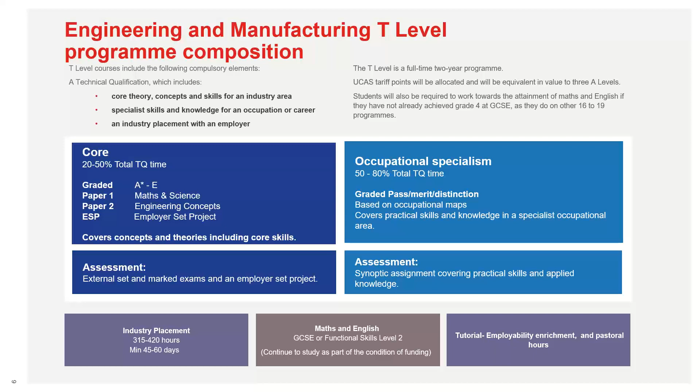The guided learning hours for this T level remain the same: 680 guided learning hours for the core and 680 for the occupational specialism, giving a total of 1,360 guided learning hours. For context, A levels are about 1,080 hours, so we've worked out this T level is roughly equivalent to 3.5 A levels.

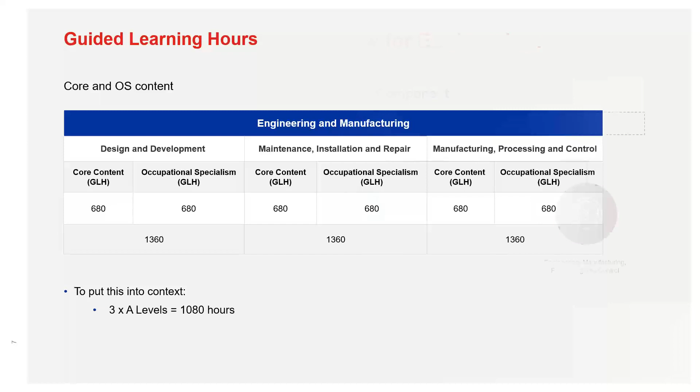The technical qualification for engineering is split into 3 pathways, with a generic engineering core that everyone completes. We're going to look at the engineering, manufacturing, processing and control pathway, which is split into 4 occupational specialisms: fitting and assembly technologies, machining and toolmaking technologies, composite manufacturing technologies, and fabrication and welding technologies. In this webinar we'll go into each individually and look at the specification and the occupational specialism assessment.

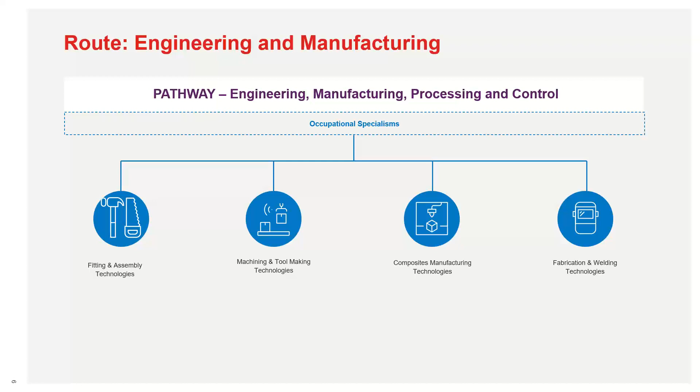The specification can be downloaded from our website, and these are the live versions. In the PDF handout, if you click the link under T-level engineering manufacturing control as shown on screen, it will take you directly to our website to view the specification. You can also access it via the T-level landing page at the top of the screen.

If you didn't have this webinar or the PDF, how do you get to our specifications? On our website, in the search engine at the top, type in 8713 and press search. Under the search results, you'll see it listed as T-level technical qualification in engineering and manufacturing. Once you click that link, you'll go directly to the specification page.

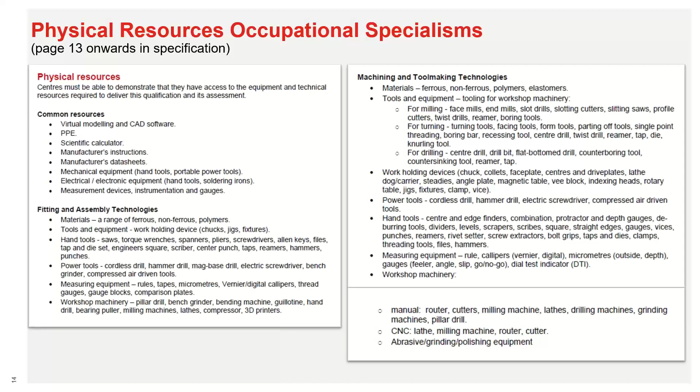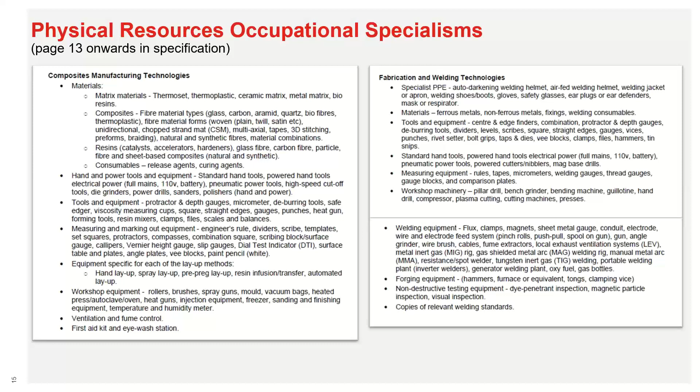So what we've got now is the actual qualification scheme component. Within this specialism, as in our previous webinars, there are different durations for different tasks. Fitting assembly is 25 hours 15 minutes, machine and tool making is 25 hours 15 minutes, composite manufacturing is 24 hours 15 minutes, and fabrication and welding is 26 hours 15 minutes. Different tasks have different durations to complete the assessments.

The mark scheme is still 90 marks and the weighting is still 100%, and it's externally moderated - marked by yourselves and externally moderated by us. The final award for this will be pass, merit and distinction.

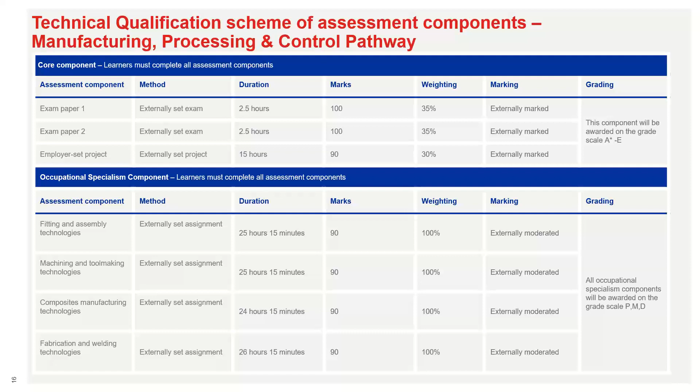So just in summary, it contains 90 marks, a variety of durations across the different occupational specialisms, externally set by us, internally marked by yourselves, and externally moderated by us.

It's an overarching project brief. It has a range of individual tasks that are mapped to the performance outcomes per specialism, and we'll look at those in more detail.

We've also got the mark schemes that reflect individual performance, and the mark scheme is classified as a threshold learner - i.e. a pass - up to a distinction learner. So you've got different mark schemes to apply for this assessment.

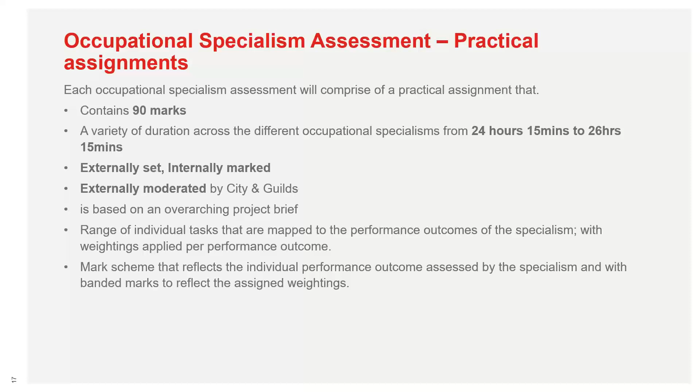What we're going to do now is look at these occupational specialisms in more detail, starting off with our fitting and assembly technology.

The fitting and assembly technology has performance outcomes weighted as follows: 17% for PO1, analysing; 20% for planning; 27% for producing; 20% for supporting the delivery material - in other words, monitoring the processes and doing quality checks; and 16% for producing that communication.

What you also notice on this specification is that there's no collaboration working with others, like in D&D and MIR. So again, it's more about analysing, planning, producing, quality checking, and communications. The weightings for each performance outcome will remain the same for every version of that practical assignment in fitting and assembly technologies, to make sure we're meeting industry needs and it's comparable between each assessment over the time of the qualification.

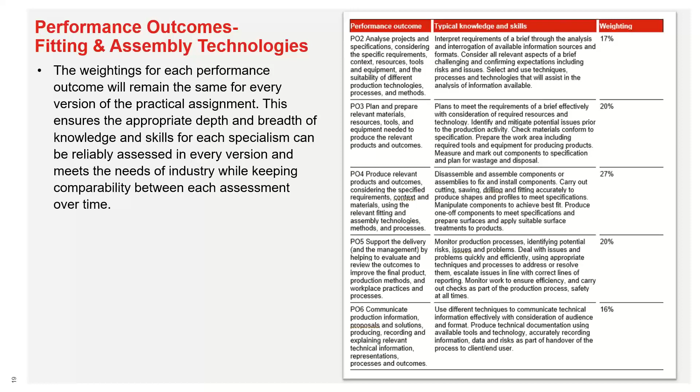To find more information, we're going to look at what an occupational specialist assignment is - you can find that on page 33 in the specification. As previously said, it's externally set, internally marked and externally moderated. For fitting assembly technologies, we're going to be doing analysis, planning, producing, supporting and communications.

With the assessment overview for fitting and assembly, we're going to do assessment themes that will be marked against those grades, from threshold to distinction. That's going to be health and safety, planning and preparing, production, and quality review and evaluation.

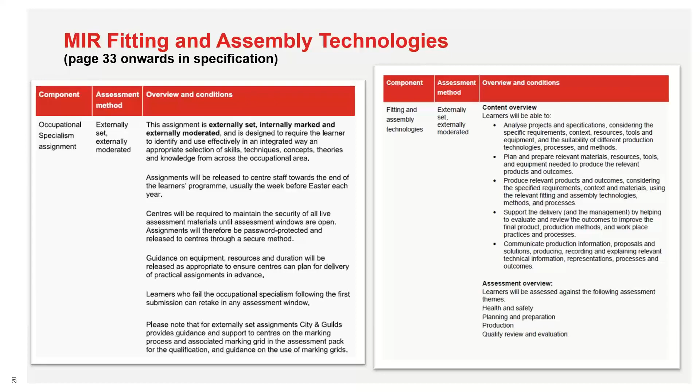The specification for fitting assemblies can be found on page 84 onwards. As you can see in this snippet, it's identified with the code 331. So when registering learners, you'll notice it's going to be under 331.

Within this type, we're going to be looking at scientific methods and principles of using materials, the tools and equipment, regulatory and legal requirements - get that right - project management, quality inspection, drawings, planning and preparing, and communicating.

Within the specification for fitting and assembly, we've got those performance outcomes. As you notice, we've got underpinning knowledge as outcome 1, and then performance outcomes start from 2 through 6. Outcomes 2, 3, 4, 5 and 6 will be assessed by the practical assignment. In addition, we've got digital skills, maths and English, where learners can develop those skills further.

So what we're going to do now is look at the knowledge part and how to interpret the specification.

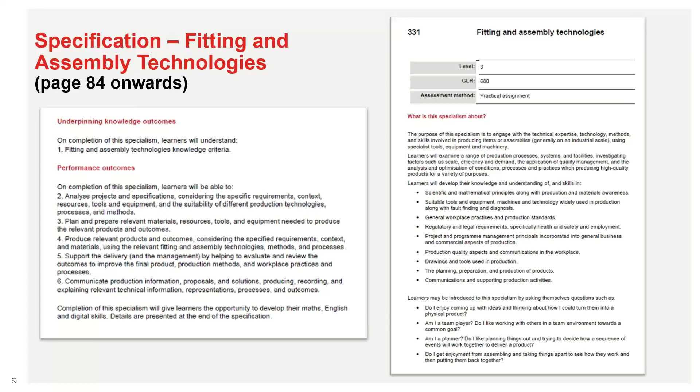So as you've seen on the screen, it's from page 86 onwards, and this is how it looks like within the qualification. The learning outcome is at the top, so that's 1.1, which is planning, preparing, implementing, manufacturing and processing activities. We then have the range, put together for topics that need to be delivered and assessed. The learner needs to know about types of planning, technical information, scale of work, and cost breakdown and other factors.

In addition to that, we have details of what part of the topic is. For example, in engineering drawings, within the bracket, we've got design, tooling, detail, sub-assembly and assembly. In other words, when teaching that topic, we need to go into those key areas in a bit more detail. Then we've got that box at the bottom called 'what do learners need to learn?'

Within there, we've got the primary purpose of that delivery section. For example, the learners need to know the difference between the scale of work in production, manufacturing and processing activities. Within that range section, we've got how to plan and prepare for those activities as well. That's the type of questions the learners will need to ask when completing those practical assignments.

In this one, in the skills section, it says not applicable, but usually we have some numbers there, which we'll see on the next slide. They relate to the core skills: English, maths and digital. If you see anything with an E, that's English, anything with an M is maths, and anything with a D is digital skills. Those are identified within the specification for each type of skill.

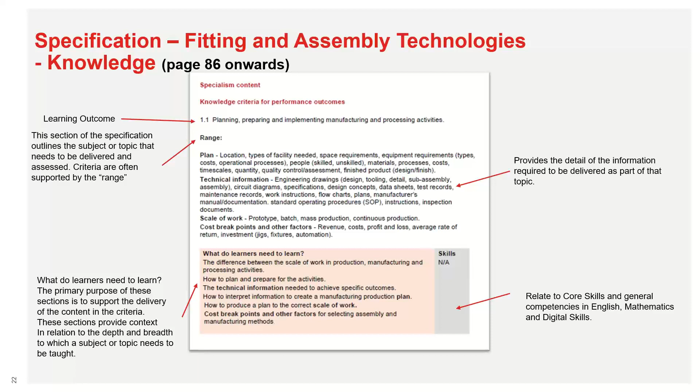We're now going to look at the practical skills for fitting and assembly. It's the same setup, the only difference being that we have 'what do learners need to demonstrate' in the pink box now. These are the primary skills that the learners need to demonstrate during that practical assessment and also when completing the practical assignment that we're going to set.

They will need to learn and demonstrate how to set up tools and equipment to carry out cutting, drilling, sawing and fitting, select the most appropriate method to produce a component, use hand and machine cutting tools to manipulate materials into shape, and also fasten components together across a range of different assemblies.

As you can see identified on this one, we've got some skills identified, and that relates to the maths skills. So MC1 is mathematical skills, and it's going to be under skills 1 to 5. We've also got some range as well in there, so different types of methods.

During a practical session, the learner should be learning cutting and sawing using different sawing techniques, drilling using different drilling techniques, and fitting using different fitting techniques. So that's what we're expecting the learners to do to complete that practical assessment on the OS.

So we're going to look at the exemplar assignment now, and we're going to produce these practical completions for you, and also give an example of the written report for a pass learner and a distinction learner, or a threshold learner and a distinction learner.

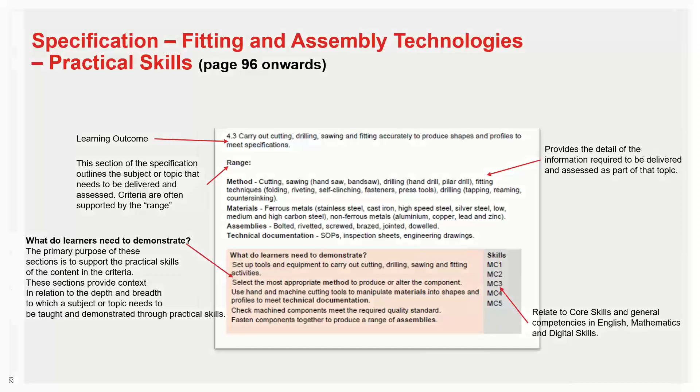So the OS exemplar assignment brief for fitting and assemblies technologies. This is just a snippet out of the actual assignment brief, because we do supply you with the actual drawings of the drill jig assembly. No point putting them on here today, but you'll be able to see that when we put it onto our website. If you'd like a copy of this, then do please let us know.

So the assignment brief is that you're working as a fitter maintenance engineer in a large-scale fabrication facility, and you need to create a jig that is going to do 100 parts per batch, a new component jig, yeah?

In other words, drilling some holes and some spacers. So you need to create a drill jig to drill a series of holes in spacers, quality test that drill jig, produce a sample drill part for the quality check, evaluate your processing, and present your findings to your supervisor in a handover meeting. The allocated time for that task is 25 hours and 15 minutes.

It's been split into 3 parts. Task 1 is your planning stage, which is 3 hours. Task 2 is classed as 18 hours, so that's the practical stage, i.e. producing that drill jig. Task 3 is the quality check as well as the meeting with the supervisor, and that's been allocated 4 hours and 15 minutes.

Again, these are all going to be under supervised control conditions, and when breaks are being taken, they're making sure that the room is locked and all material is kept securely during that break time. So everything must be put away and then brought back out after the break.

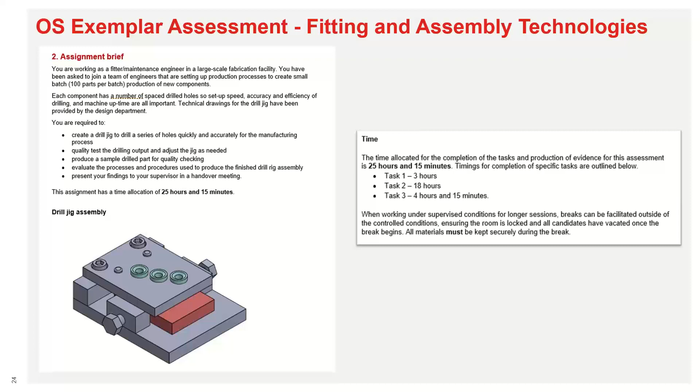So the tasks for this fitting and assembly part, we've got task 1, which is the planning stage. The candidate's got to analyse the brief and produce resources for the production of that drill jig. They're then going to produce a risk assessment covering all the activities, a method statement with justifications and reasons why they are selecting those activities.

A work plan of how to produce that jig in step-by-step stages, a quality check that's going to be used in task 2, or commissioning check in task 2, and a quality check in task 3A. If they're using any equipment, they need to carry out calibration checks on measuring equipment as well, such as your calipers, your go-no gauges, your DTIs, etc. So they need to make sure they've got some calibrating as well.

And under that task, we've got some resources that we expect the learners to be using. Within task 2, they're now going to prepare the work area, produce the drill jig using both hand tools and workshop machinery. On the drawing itself, it will tell you if it's going to be made by hand or made by machine.

Commission the assembly and complete the commissioning check list, what they've produced in task 1. Then reinstate the work area following the production of the drill jig assembly. In other words, putting the workshop back nice and tidy as it was originally.

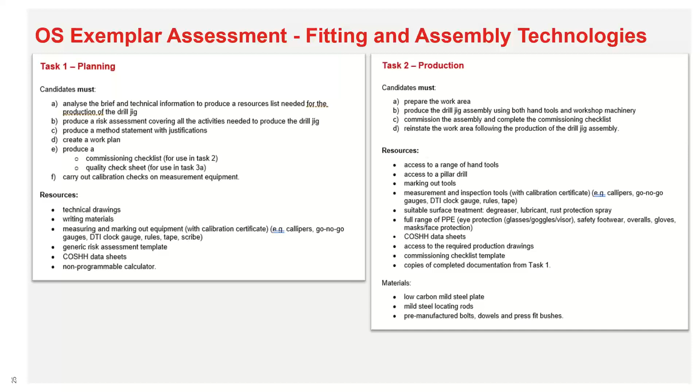So in task 3A, we've got that quality review. In other words, carrying out that full quality inspection to complete that drill jig and record the findings on that quality check sheet that they completed in task 1.

And then produce a sample drilled part, using that drill jig to produce a sample. In task 3B, they're going to be evaluating it - in other words, what went right, what went wrong, did they make the component finishes to correct sizes, what happened to the drilled sample part, did it work well, any improvements they could see with that drill jig, or any adaptations, or what can reoccur, so it might have lifted up when trying to drill, for example.

So in other words, evaluating what they've completed, and it's roughly around 800 words long. Once all that's been completed, they then need to submit all that to their supervisor, or the assessor who's going to be acting as a supervisor, to complete the handover procedure.

So confirming that the work has been completed, an overview of the findings in the quality inspection report, suggesting improvements to design or production processes, and the final part will be handing over the drill jig assembly and sample parts and quality inspection records as well. We expect that done in that completed time.

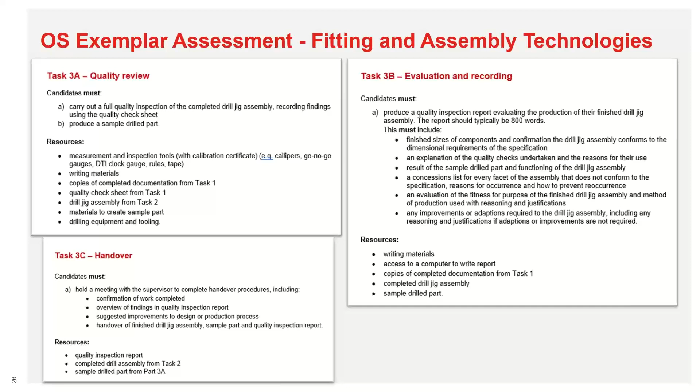So that just gives an overview of fitting assembly, and we're now going to look at the next topic, which is machining and tool making. Within machining and tool making, we've still got those performance outcomes, but these have been identified as different to fitting and assembly.

This is because of the depth of the practical sections that needs to be completed. So with this one, we've got a performance outcome of analysing at 17%, planning at 21%, producing that component at 27%, supporting that delivery, or in other words doing that quality check and processes at 19%, and the communicating part is going to be at 16%.

So a bit different from the fabrication and the fitting and assembly task. As you can see, a bit more in-depth that we need for the learners to complete within this section.

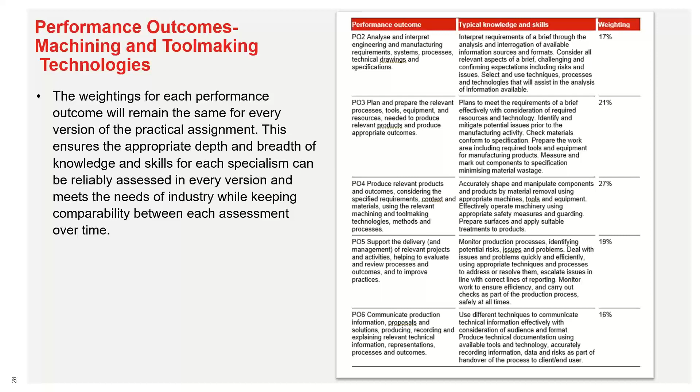So the MPC machining tool making part, you can see some bit information about that on page 33 in the specification. And again, we've got those assessment themes that the learner is going to be assessed via to get that threshold and distinction grade: health and safety, planning and preparation, production, and quality review and evaluation. And then we've also got that content overview where we've got analysing, plan, produce, support, and communicate.

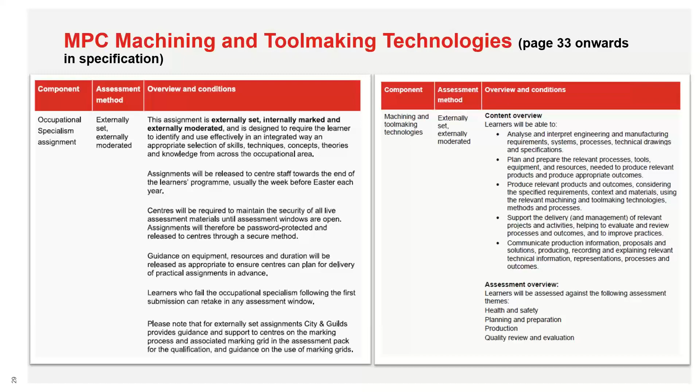So this specification can be found on page 109, and it gives a title code of 332. Again, the knowledge part, I'm not going to go into the knowledge of the practical skills in detail like I did for fitting and assembly. It's the same way of how to interpret the specification. But the knowledge can be found on page 111 onwards, and the practical skills is on page 121 onwards.

And with this one, the learners are going to look at tools and fixtures to aid manufacturing of a new or changed component, how to set up and select safely operations, producing products to specification using suitable methods and techniques, undertake preventative planned maintenance, check for faults and diagnostics, and utilising project management and process improvement. And again, we've still got that knowledge section and that skills performance outcome section as well.

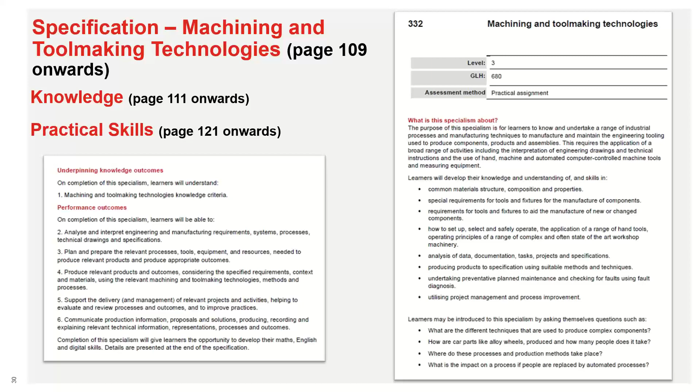So the OS Exemplar assignment for machining and tool making, we've got this one on the screen now. And as you can see, it's a bearing assembly they need to produce, allocated 25 hours and 15 minutes. So this is going to be employed as a research and development department of a local engineering company, asked to produce a bearing assembly to be used in a roller assembly of bespoke conveyor systems. And the bearing assembly is to be manufactured using low carbon steel and nylon, produced using the lathe and the milling machine.

So the learner's got to create a new bearing assembly, use manual and pre-programmed CNC machines to manufacture the component, carry out production checks, make adjustments to the component as required, quality checks, evaluate the processes, and present their findings to their supervisor. And again, we will supply you with the dimensions and drawings for the bearing assembly as well.

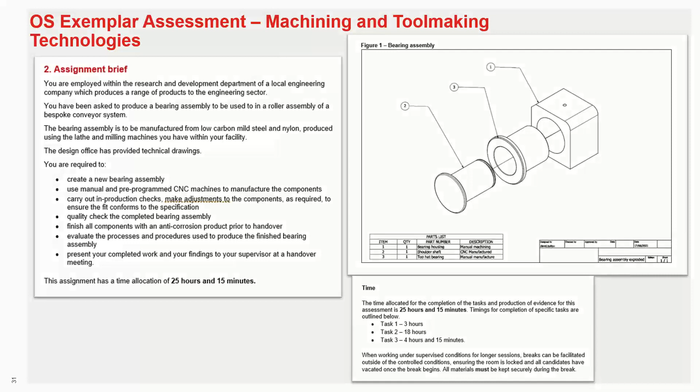So within task 1, we've got that planning stages where we need to analyse the brief, produce the risk assessment, a method statement and a work plan. So similar to what we did on fitting and assembly.

Task 2 is that production. So they've got to do 2 ways of producing this: a manual and pre-programmed CNC machine specification. So they'll be accessing a manual lathe and CNC centre lathe, and also a conventional manual milling machine.

Apply suitable surface treatment to the finished component, so anti-corrosion surface treatment such as degreaser, lubricants, sprays, light tool oils, etc. Commission the assembly and then reinstate the work area following completion of that bearing assembly.

And again, the materials have been identified as low carbon mild steel billet for the shoulder shaft, low carbon mild steel billet for the machine bearing housing, and a nylon rod billet for the top hat bearing. So there's the types of materials that the learners need to have access to.

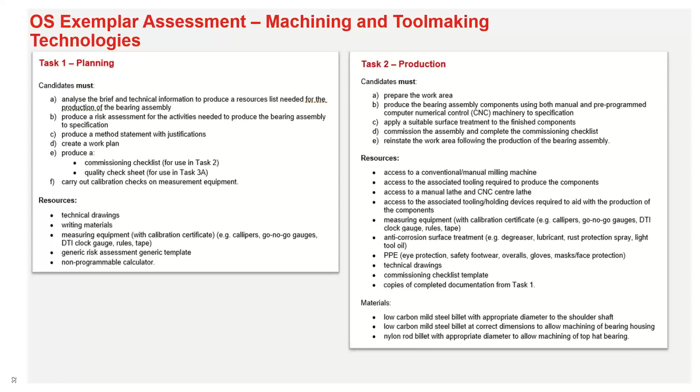So in this one here, we've got task 3A, which is our quality review. In other words, carrying out a full quality inspection and recording those findings, and also using that quality check sheet that they completed and designed in task 1.

In task 3B, we've got that evaluation and recording—in other words, evaluating what they've completed. And then task 3C, we've got that handover meeting, in other words handing over all the information that they've completed so far, and also the bearing assembly from what they've completed in task 2.

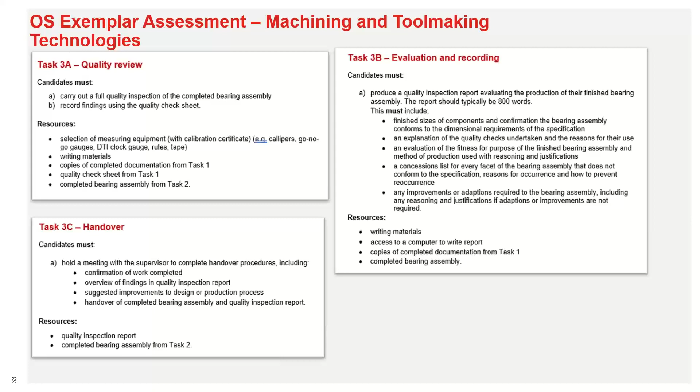So the next occupation we're going to look at is going to be Composite Manufacturing Technologies.

So again, with Composite Manufacturing Technologies, the performance outcome has changed, and this is because there is a lot of hours and a lot of time to complete the production of the moulds. So therefore PO4 is now at 43% weighting: analysing at 10%, planning is 28%, producing that composite mould is at 43%, supporting the delivery is 10%, and then the communication part is at 9%. So a bit different from the other two, but you can see where it's been weighted and the different parts within it.

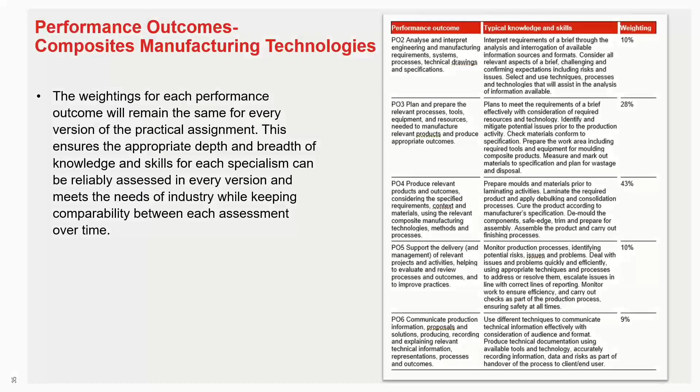So the specification for MPC composite manufacturing is on page 33 onwards. That bit covers what the occupational specialist assignment is, and also the content overview.

Again, the assessment themes are still going to be the same: health and safety, planning, preparation, production, quality review, and evaluation.

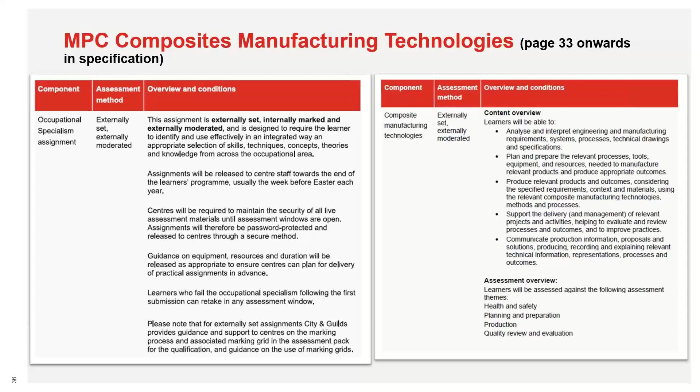And again, we're going to be analysing, planning, producing, supporting, and communicating as well. So the specification for composite manufacturing has been given the title 333, and that can be found on page 137 onwards. The skills are on page 152 onwards, and the knowledge is on page 139 onwards. Within this composite manufacturing technology, we are going to talk about composite manufacturing quality inspections, using different types of composite manufacturing techniques, also using fault finding techniques, and also planning and preparing using composite products. So really a hands-on practical assignment for the learner to complete.

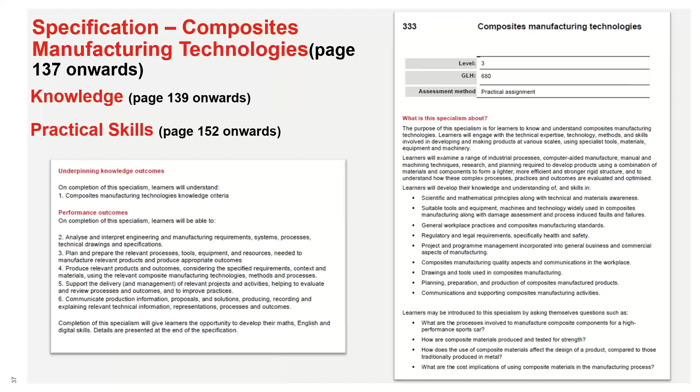So the example assignment for composite manufacturing - what you've got is a completed assembly view of the product. In this one, you're asked to produce an assembly, using a spacer block within the aerospace industry to ensure the correct spacing of wing skins in a jig during the manufacturing process. Each component has a number of plies which are laid up on a platen or onto a core material. You're going to get the technical drawings for all different parts of the composite process.

So the learners need to create a sample spacer block assembly using composite material and a vacuum bag consolidation method. They need to perform production quality checks to ensure the dimensions and make any required adjustments to confirm the specification. They're then going to do the quality test.

They're then going to evaluate. We're going to identify any faults, and then record and present the findings. This has been allocated a time of 24 hours and 15 minutes, where the practical task section is 16 hours.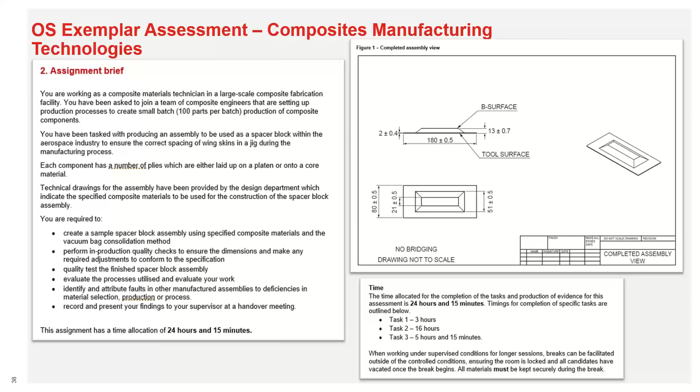So with this sample, we've got different types of tasks. Task 1 is your planning. Within that, we've got to produce a risk assessment, analyse the brief, method statement, work plan, quality checks and calibrations.

Task 2A is allocated as the preparing the mould section. So they need to prepare the work area, prepare the mould and reinstate it, and the different types of mould they require. Then task 2B is going to be production of the spacer block and component.

We're going to prepare the work area for the laying up activity, construct the spacer block component - marking out and cutting material, laying up, curing and demoulding - and then reinstate the workplace.

And for the resources, we've identified what type of material is recommended. We've also typed in what type of laminating consumables we need. So a variety of different resources for the composites, what we'd expect learners and centres to have.

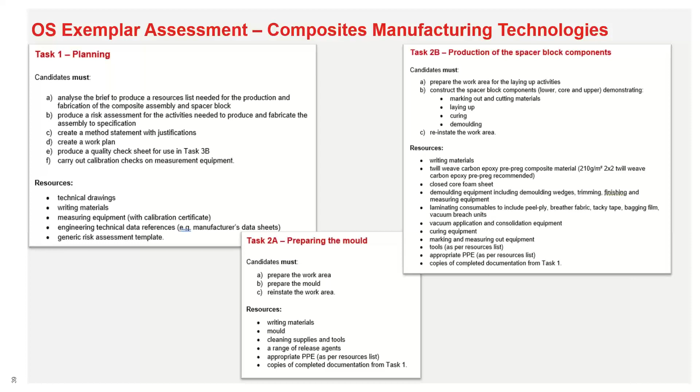So we continue with task 2C, which is then going to be the assembly. In other words, we're going to prepare the work area for assembly activity, complete the spacer block assembly, demonstrating the bonding process, the curing process, and trimming and finishing process. And again, those types of resources that we're going to expect the learners to use as well.

For task 3A, we've got that defect identification. In other words, the candidates need to carry out a defect identification inspection of the prefabricated defect sample assembly, and then suggest processes that should be introduced or modified to prevent defects present in the defect sample assembly from reoccurring in future production runs.

And they're expected to have a prefabricated defect sample assembly to look at, some materials, as well as some calibration tests. One part mentions measuring equipment with calibration certificate as well.

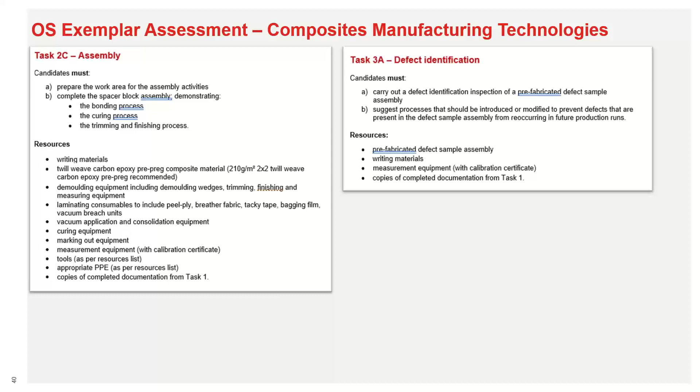We then go directly back into the quality review, just like the other previous assessments. And then we've also got that handover task, where we're going to complete the spacer block assembly, quality inspection report, and anything that needs to be handed over to complete the section.

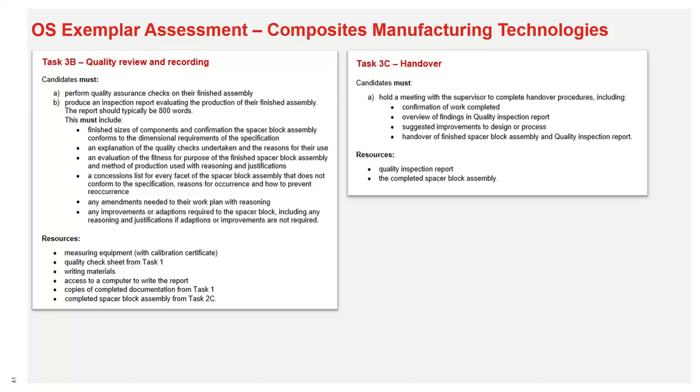So with composites being a bit more detailed and with more separate individual tasks, the final one in this pathway is going to be Fabrication and Welding Technologies.

So Fabrication and Welding Technologies - again, this performance outcome has also changed. PO2 is at 13%, PO3 19%, PO4 35%, PO5 21%, and PO6 is at 12%. So different types of performance outcomes and weightings on this assessment.

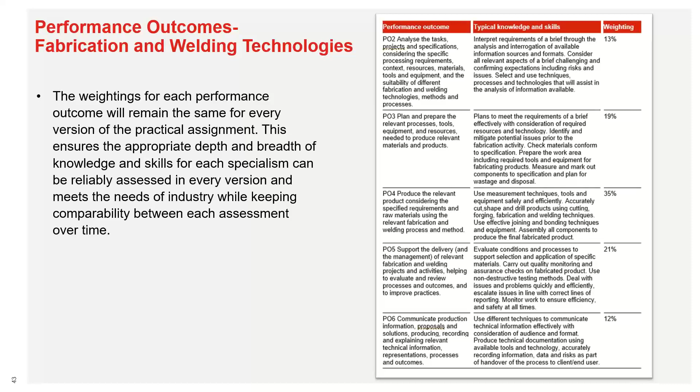As previously identified, you can find what fabrication welding's assessment method is going to be, and that can be found on page 33 onwards within the specification. And again, we're still using those assessment themes to assess the learner against.

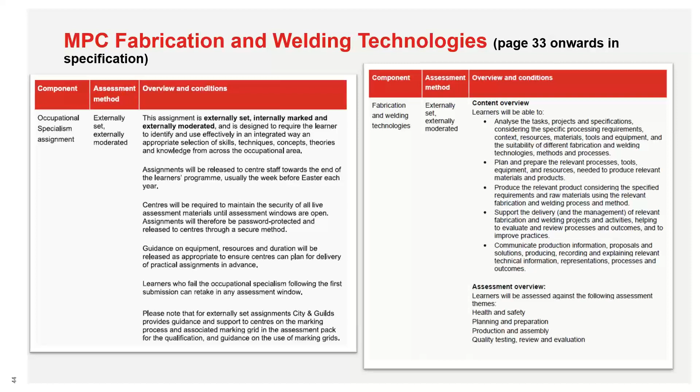The specification for fabrication and welding is on page 166 onwards. The knowledge is from page 168 onwards, and the practical skills is on page 176 onwards.

With this one, we're going to talk about different types of machinery and technology used in fabrication and welding, the processes and procedures used, skills in analysing technical documentation, and also producing products to specification.

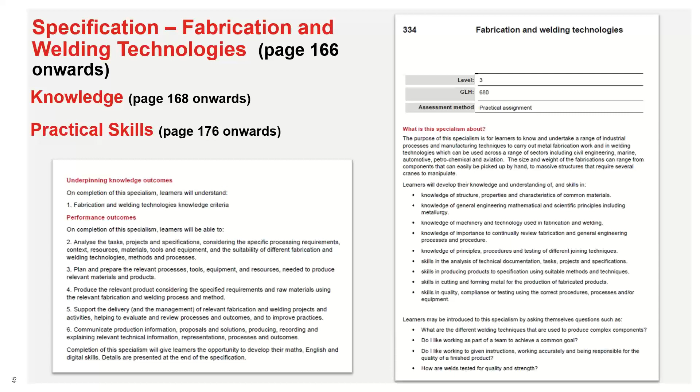So the exemplar for this one is shown on the screen, and it's an anchor that they need to complete. We've allocated this one as 26 hours and 15 minutes, where task 2, the practical section, is allocated 20 hours to complete. So the learner will need to fabricate all parts of that anchor as shown on screen: the stock, the crown, the shank, the fluke and support.

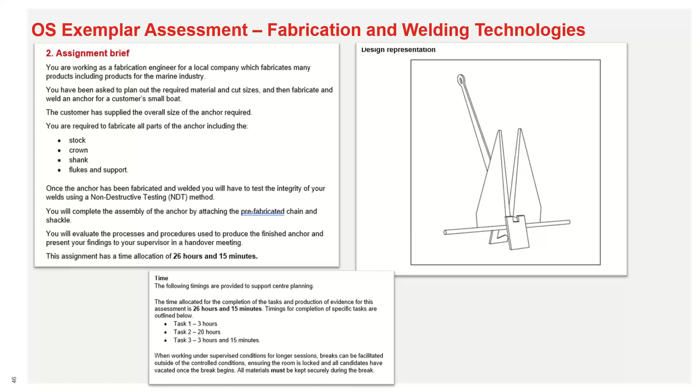Then once it's been fabricated and welded, they need to use a non-destructive test method to see if it's welded correctly. So again, a bit more hands-on with the practical side in the workshop, making sure that it meets the requirements.

So with this one, we've got that planning stage and production stage. And again, welding equipment - they need to use 2 from TIG, MIG, MAG and MMA. They need to use some forging equipment, some cutting equipment and abrasive equipment as well.

The material required is 6mm mild steel plate, 6mm mild steel round bar, 10mm mild steel flat bar, a mild steel chain which has got to be prefabricated and given to them, a shackle, again prefabricated and given to them, and the pin as well. That will be identified on the drawings within the occupational specialist assignment.

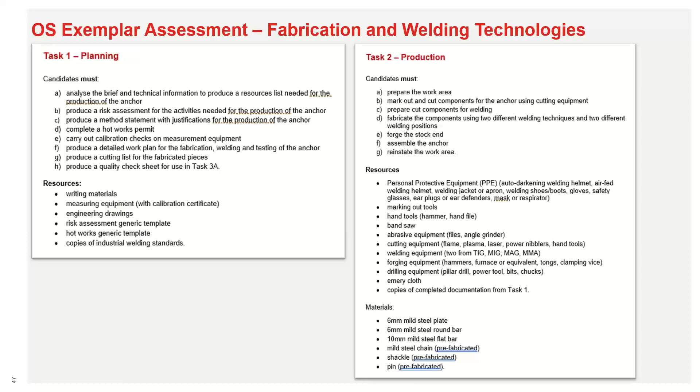We then got the tasks part, so quality review, handover and evaluation and recording. Similar to the other ones, except regarding the quality review, we've got an NDT test result sheet that needs to be done as well. What they need to do for that non-destructive testing is test it on 3 different welds - so within that anchor, 3 different areas that need to be non-destructive tested.

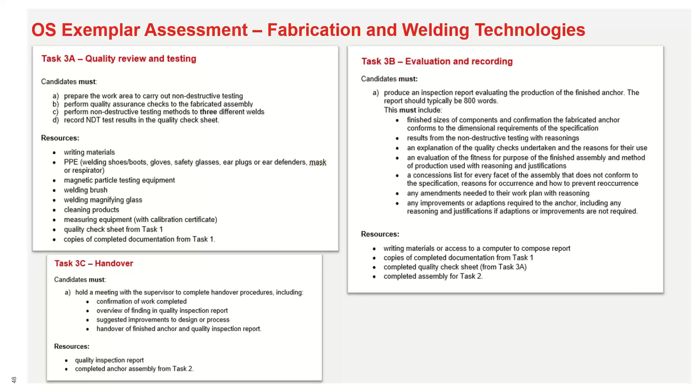So within all these assessments, right at the back of the actual briefs are the marking grids. The marking grids are identified regarding those assessment themes - previously, health and safety, planning, quality checks, etc.

And within this one, for example, the assessment theme is health and safety. Health and safety goes across task 1, 2, 3A and 3C. This is taken from the fabrication and welding one. Within there, we've got that indicative content, and that indicative content is what we're expecting to see regarding the learner's work on health and safety.

In other words, have they identified the correct checks and preparation of resources? Have they identified different types of isolation procedures? Have they identified the correct use of PPE? So a lot of information that we expect to see on those sheets when they complete those assessments.

You then got the marking band grids. So for example, the one on the screen shown there is marking per band - 1 to 4 is our pass learner, 9 to 12 is our distinction learner. So for risk assessment, for example, the pass band is mostly completed and covers some of the major risk factors, whereas a 9 to 12 band learner's risk assessment identifies all the major risks and all associated risks as well - that bit more detail and information that we expect to see.